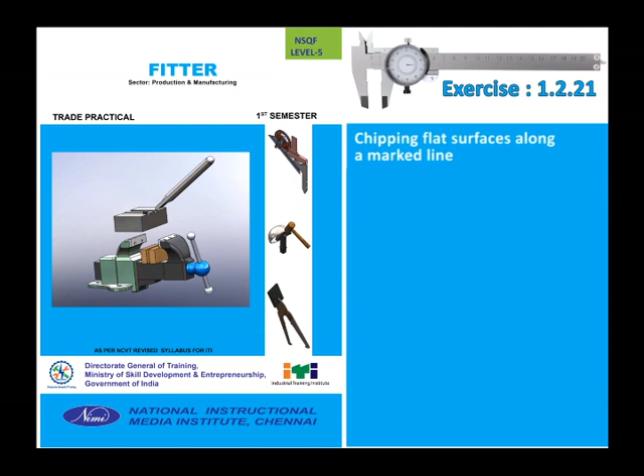1.2.21 Chipping flat surfaces along the marked lines. Objective: to chip surfaces evenly using a flat chisel.

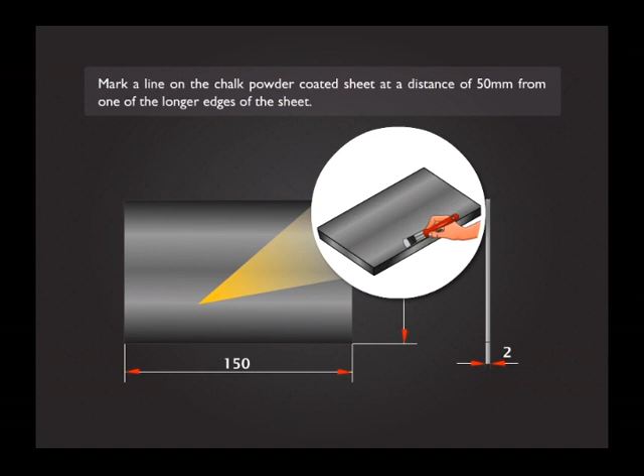Job sequence. Take a 2 mm thick MS sheet of size 150 mm by 100 mm. Mark a line on the chalk powder coated sheet at a distance of 50 mm from one of the longer edges of the sheet.

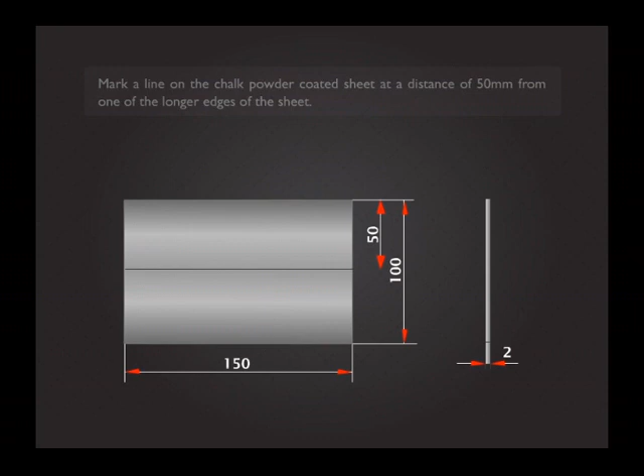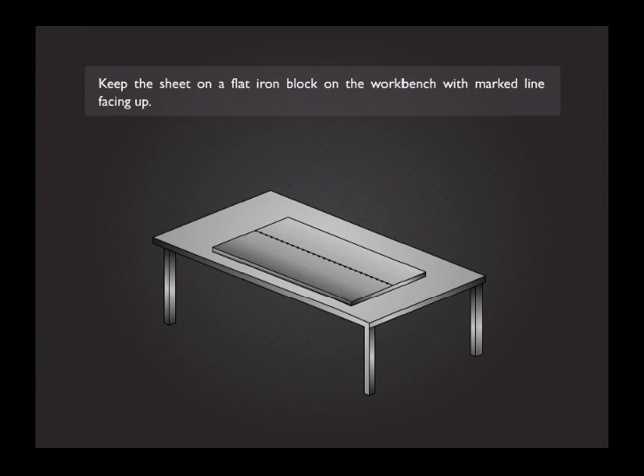Make equidistant punch marks on the line using a dot punch and hammer. Keep the sheet on a flat iron block on the workbench with the marked line facing up. Hold the sheet to the iron block using C-clamps.

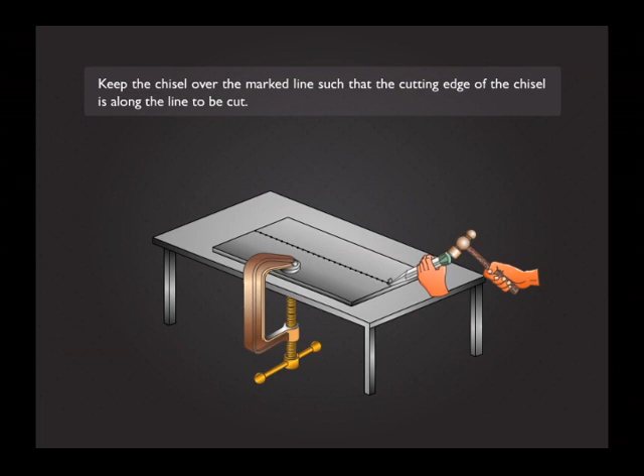Keep the chisel over the marked line such that the cutting edge of the chisel is along the line to be cut. Give hammer blows on the head of the chisel such that the sheet gets cut under the action of the chisel edge. Move the chisel further along the line to be cut and proceed with the cutting operation until the entire length of the job is cut.

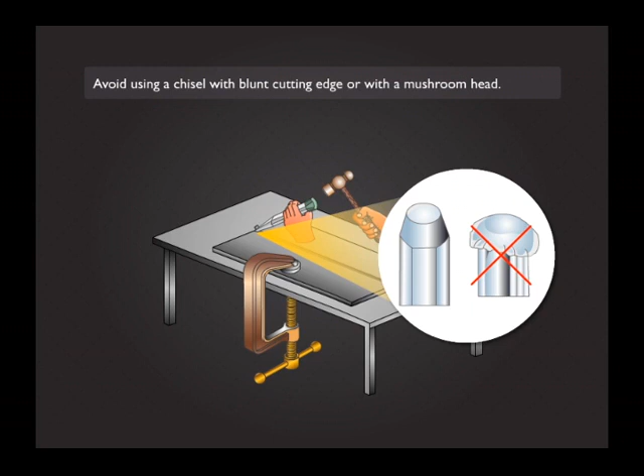Avoid using a chisel with a blunt cutting edge or with a mushroom head. Use a hammer whose head is firmly fitted to the wooden handle. Keep the cut sheets on the anvil and remove any surface waviness formed due to chiseling using the face of a hammer.

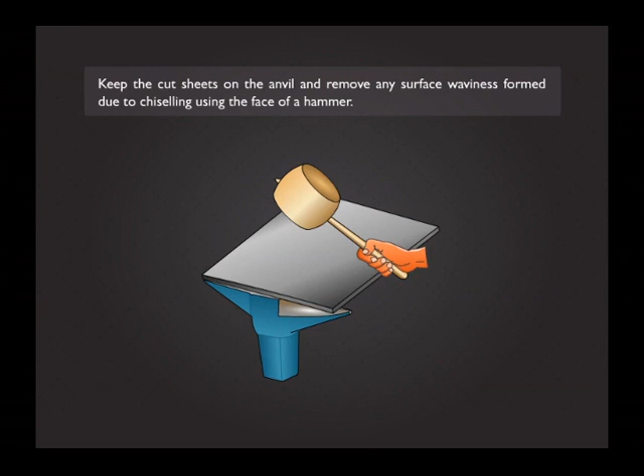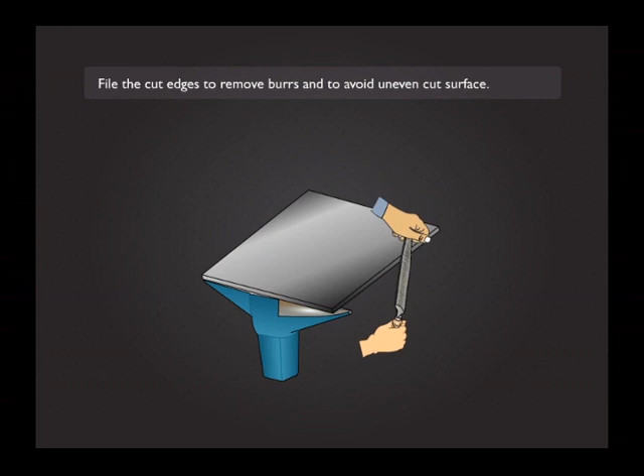File the cut edges to remove burrs and to avoid an uneven cut surface.

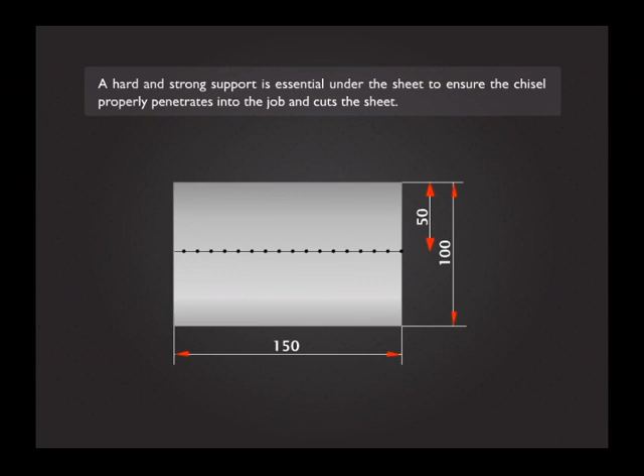Skill sequence. A hard and strong support is essential under the sheet to ensure the chisel properly penetrates into the job and cuts the sheet. The chisel has to be held vertically to get an effective cutting action.

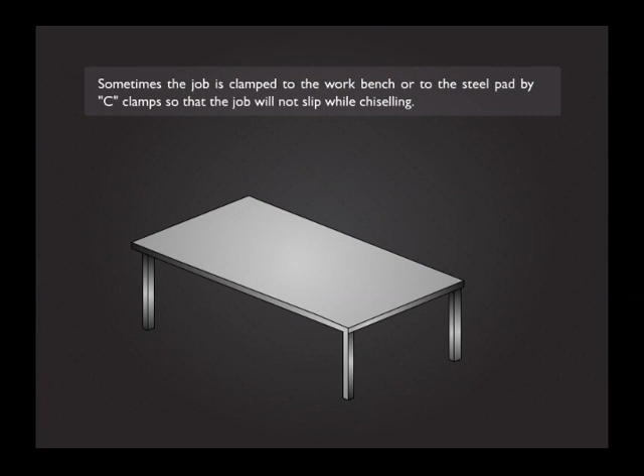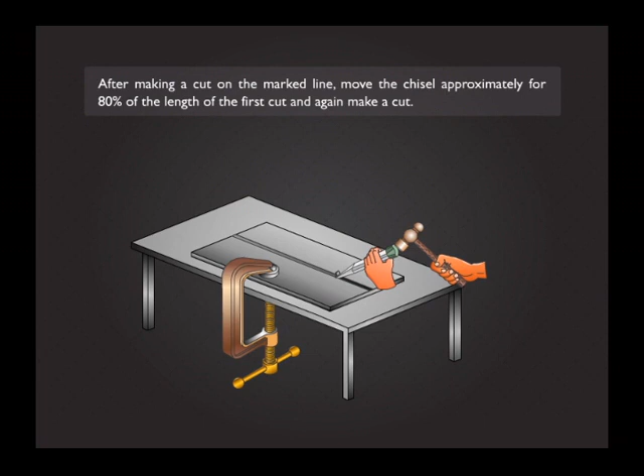Sometimes the job is clamped to the workbench or to the steel pad by C-clamps so that the job will not slip while chiseling. After making a cut on the marked line, move the chisel approximately 80% of the length of the first cut and again make a cut.

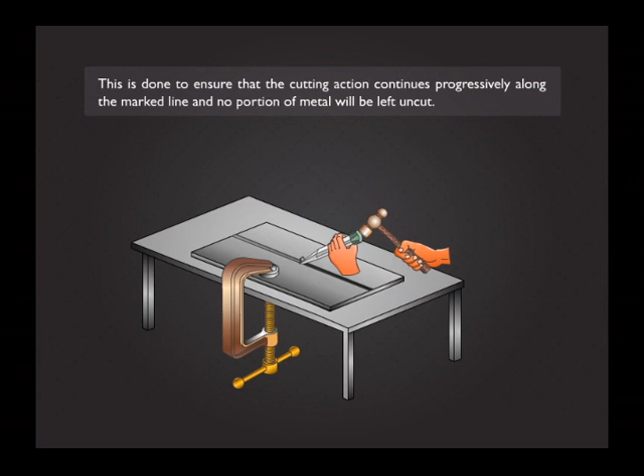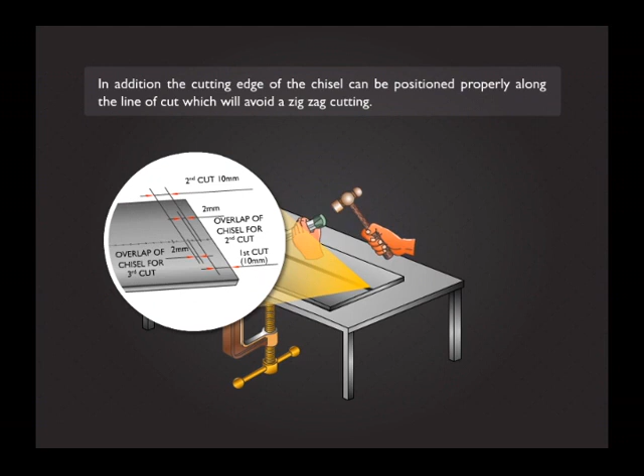This is done to ensure that the cutting action continues progressively along the marked line and no portion of metal is left uncut. In addition, the cutting edge of the chisel can be positioned properly along the line of cut, which will avoid zigzag cutting.

Proceed to make cuts by the flat chisel as explained above until the entire length, that is 150 mm of the job, is cut on the punch marked line.